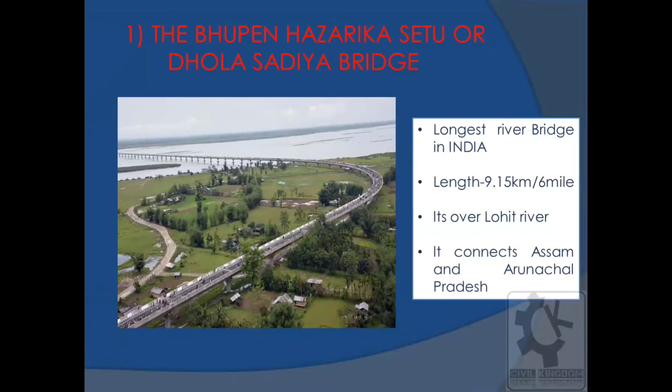First one is the Bhupen Hazarika Setu or Dhola Sadiya Bridge. It is the longest river bridge in India and its length is 9.15 km. It connects Assam and Arunachal Pradesh. It's over the Lohit River and it is the longest river bridge in India. Its span is 50 meter and number of spans is 183, and number of foundations is 184.

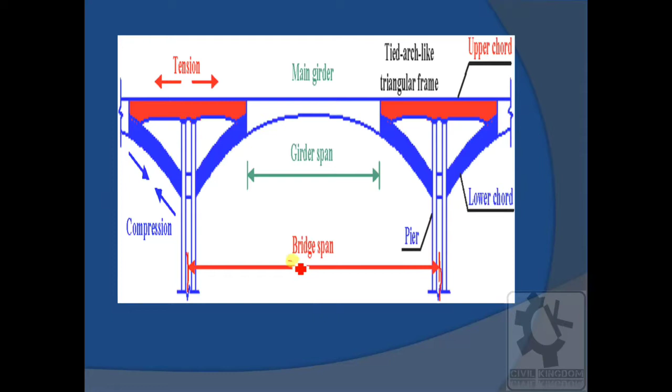Let me show you what we mean by the span. Okay, if you see, from the center of the support to the other center of the support, the distance between these two centers is called the span. So in this case the span is from the center, so that's your span. Its span is 50 meter.

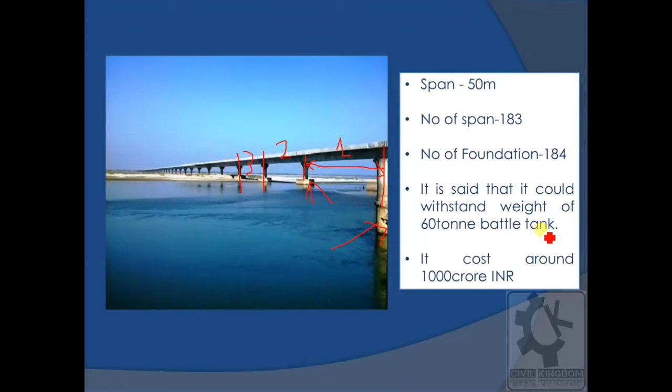Okay, and number of spans, that means this is one span, second, third, and number of foundations is 184. These are your foundations. Okay, and they said that it could withstand the weight of a 60-ton battle tank. It's a huge weight that it can bear, and its cost is around 1000 crore Indian rupees.

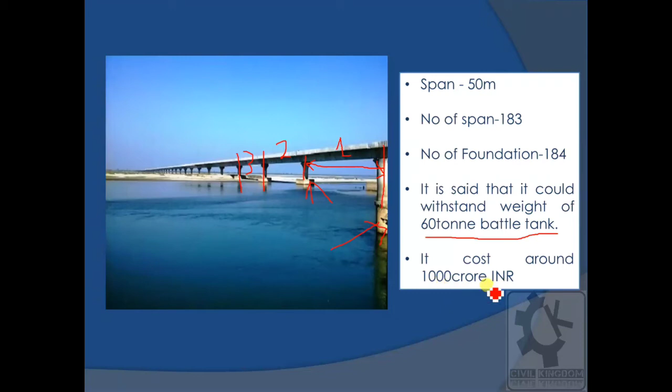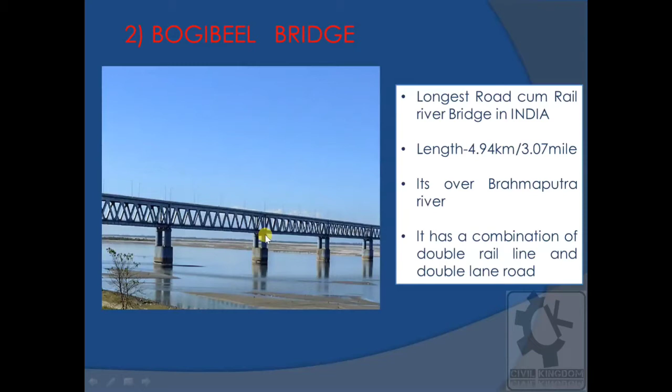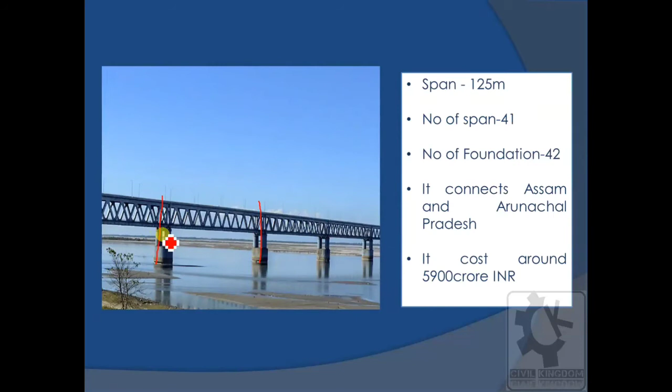And similarly, its span is 125 meter from the center. So that's your 125 meter, and number of spans is 41. That's your 1, 2, like that. There are 41 spans. And number of foundations, these are your foundations, 42. It connects Assam and Arunachal Pradesh and it costs around 5900 crore Indian rupees.

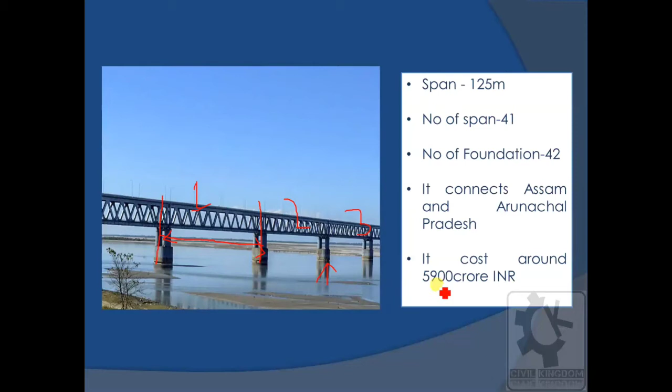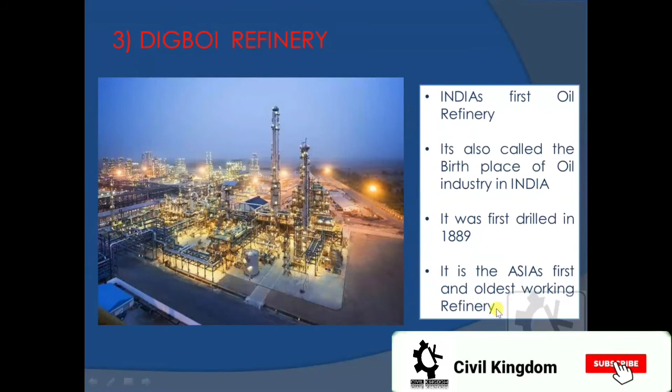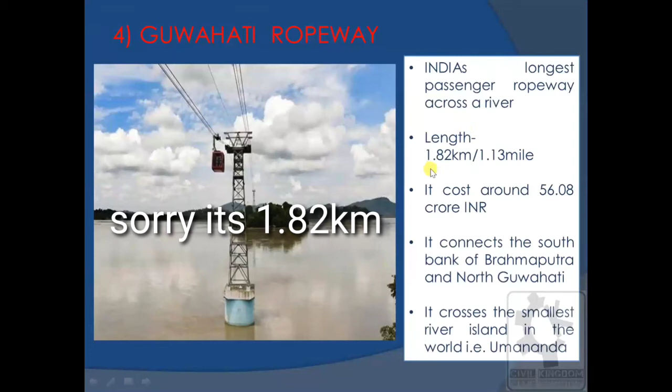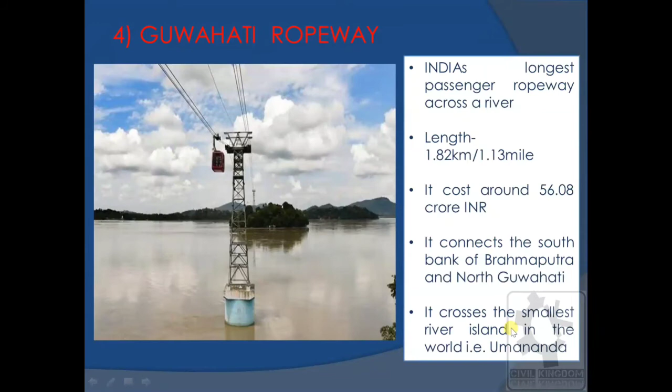The fourth is the Guwahati Ropeway. It is India's longest passenger ropeway across a river, and its length is 1.82 kilometer, and it cost around 56.08 crore Indian rupees. It connects the south bank of Brahmaputra and North Guwahati. And while crossing, it passes the smallest river island in the world, that is Umananda.

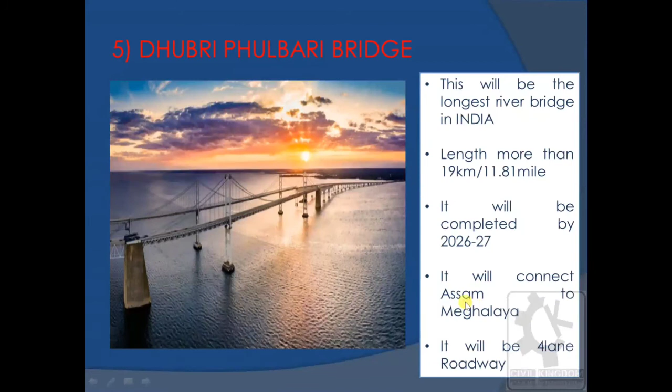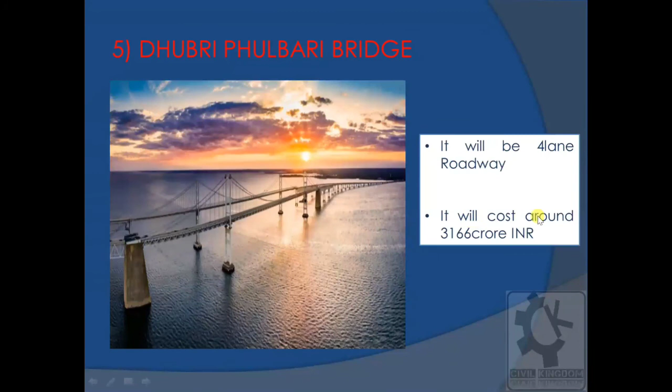And the last one is the Dhubri Phulbari Bridge. It is not yet built. It will be completed around 2026-27, and this will be the longest river bridge in India, whose length is more than 19 kilometer. That's a huge amount. And it will be a 4-lane roadway, and it will connect Assam to Meghalaya. It will have a 4-lane roadway. Don't worry about this lane, I will show you. And it will cost around 3166 crore Indian rupees.

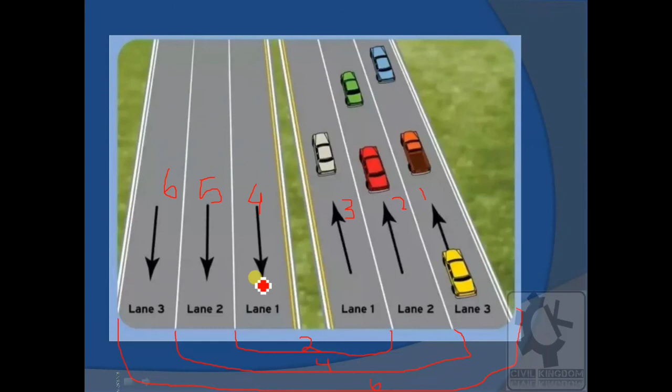So this is your lane. Let me show you, you will know. For a double roadway, it will have only one lane here and one lane here. Then it will be double. Okay. Again, similar to that, this is your 4-lane, and that's your 6. So double and 4 and 6 lane. That's how we know how many lanes the roadway is.